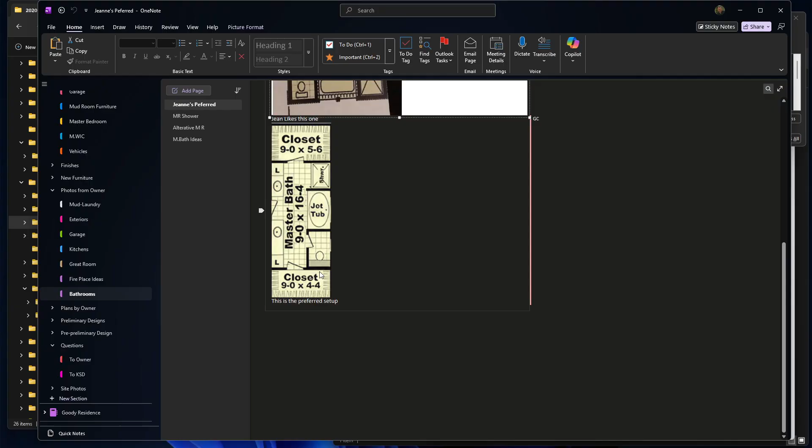We've got these spots, and I thought I should describe it a little bit. You can see this corridor through here, really tight, and then we actually end up with kind of a corridor here too. Once you get these walls built up, this really becomes quite an enclosed space.

So this floor plan, even though it's got two closets, it's got all the components that you guys are after, including these linen closets, which we don't have in your design yet, and you were pretty specific about that. So we need to figure that out. We have a vestibule. We've got a lot of the components of this.

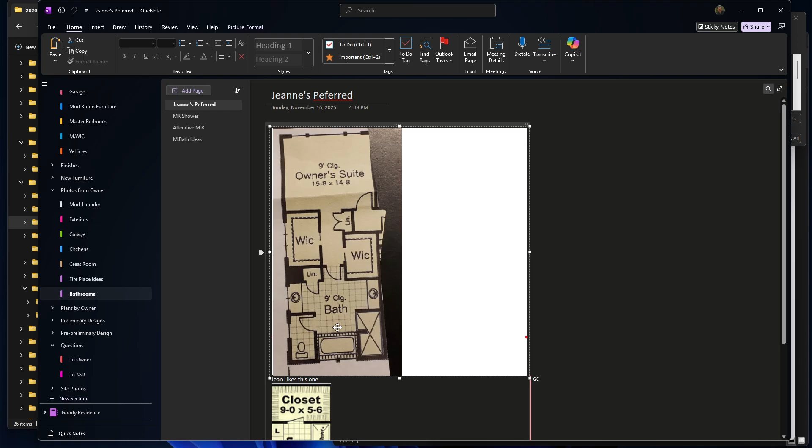But to get the feel, you can see this—I would almost call this a galley style, where we've got a way in and two pretty basic sinks on either side, with looks like they're probably intending on full height cabinets at either end. Guessing what this L maybe stands for, long or large, not sure.

This hanging is not gonna be what it looks like. It's only 4'4" in depth, 5'6" here. That's enough depth that we can actually get something going, but you can't hang opposite of something else without 8 feet. So this is 9, so opposite hanging there works out well.

Think of your clothes as about 2 feet deep once you get the shoulder and sleeves and all that stuff. So if you've got them hanging on either side, and then you've got 2 rows high, if you've only got 3 feet of space in between, then you've got 3 plus 2 plus 2. So that's basically 7 feet right there. So I kind of keep it down to an 8-foot minimum.

Prefer 9 to have hanging facing hanging, because you can't see your clothes if you're squished up against them. Even if you can fit in there, it just isn't any sort of luxurious. It's like squeezing things into place.

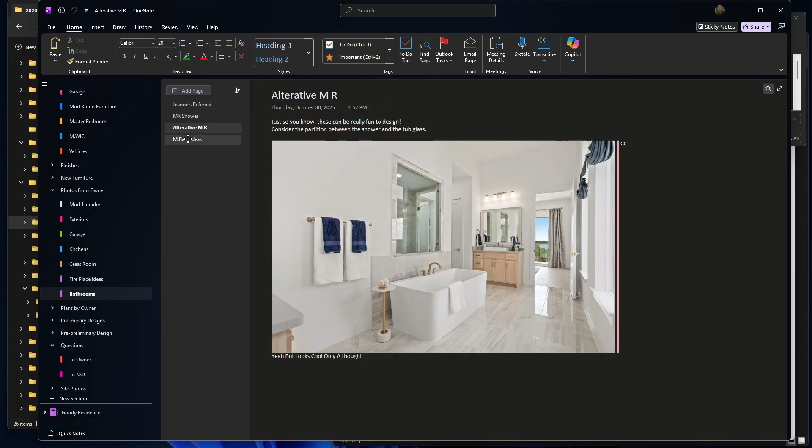We got places to put our towels. We need to have some wall space for towels in the bathroom. And then this, we've got plenty of room in our design to deal with that. And so we'll take a look at that.

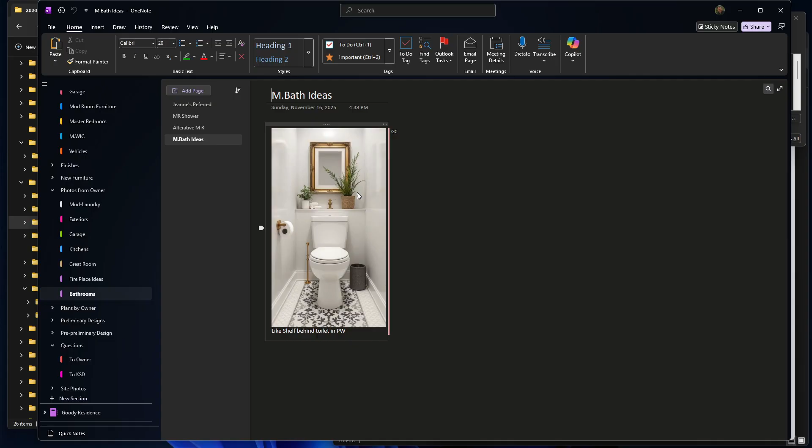But yeah, I think I like the way that this looks, and you've got to give up something to get something. And so if we want to have this space back here for you to decorate with, then we just need to accommodate for it.

So this layout here really works with what we've got going right now. So I'm going to try and work on this, and hopefully you really like this picture. And that kind of goes along the lines here.

We do have the shower, tub, and then we'll have that toilet down at the very end in the floor plan that we're working with.

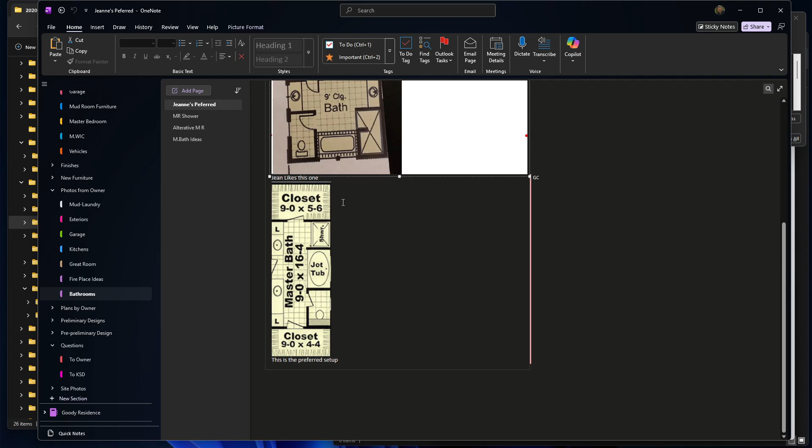I had to stop my recorder there and switch scenes. Let's close this down a little bit. And so this is the bathroom. I'm going to really focus on the bathroom for this video, try and keep it kind of short.

So what we're talking about is looking down, and this is the wall niche right here. So when the door's closed, you can see this wall niche, and we can make that any shape, size. We don't have to use it at all. Just was a thought.

Then, so in the vestibule, as we look down here, you're not looking into the bedroom, you're not looking into the bathroom, even if the doors are left open. Everything is just a nice flow, so your private and public are very separated. And you turn and go into the bedroom, or you come straight through and into the bathroom.

So what I'm looking at is taking and replacing this with that shower to get that look you're after, and putting the toilet down in this area, which is part of our last conversation.

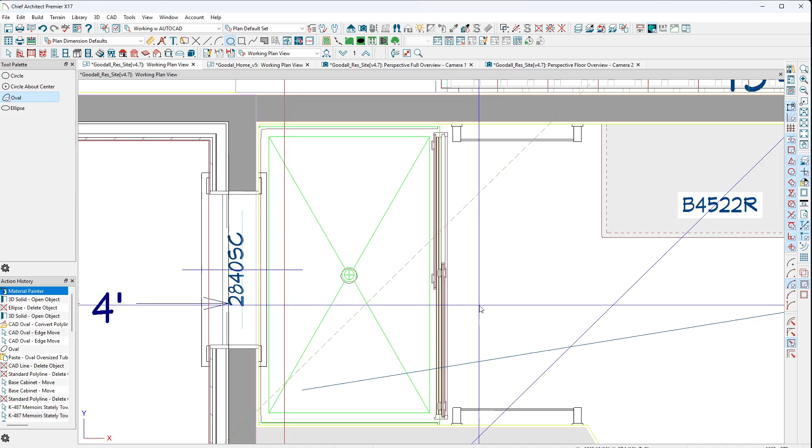In order to do that and get you that area behind, I need to pull this wall down some, because this is about enough room for a toilet, for a long toilet, which I think you want the comfortable one. So we need about 5 feet for that, and this is 4 feet across. And I know it's hard to tell, but right here, this little yellow line, that's drywall. I show the drywall so I make sure I've got the clearance. If I were doing a shower in here, we either have to use a cheap insert, or we need to buck this out a little bit to get some real tile in there.

So when we lay out what the closet looks like, I need to be considerate of how we keep things from hitting other things. That's why I put those end caps on these clothes racks so you can see how that works.

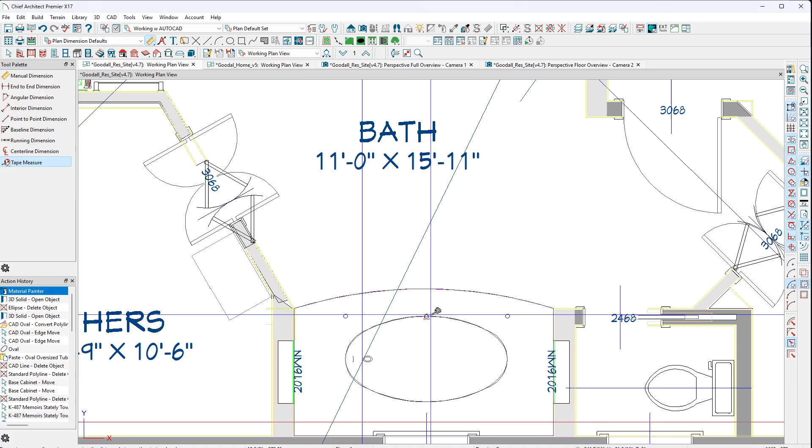This distance here for the tub I've shown is about a 5-foot tub. I used an oval in here, but it doesn't matter what we use, so about a 5 by 30. You can see I've got generous space here - this is actually a very large platform. So to get a nice shower in here, we're just going to bring this down, shrink this up a little bit. We might lose our center, but the roof center is over here anyway, so it's not part of that. And if we have a flat ceiling in here, you'll never know it - it's not relevant. So we'll be fine with that.

So I'd pull this in a little bit, then maybe we can scoot the tub down to the right slightly, and get a larger tub shower in here by shrinking up this space, because right now I've got 8 foot clear in here. No, that's not showing 8 foot. I swore I had it. There it is, 8 foot. I thought I had 8 foot. So you can see he's got 8 by 6.5, and then you've got almost 9 by 10.5. That's kind of what I'm looking at for how this is going to work out.

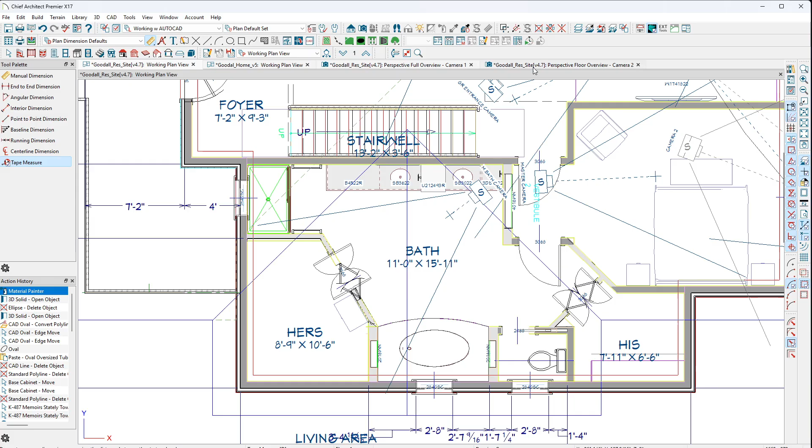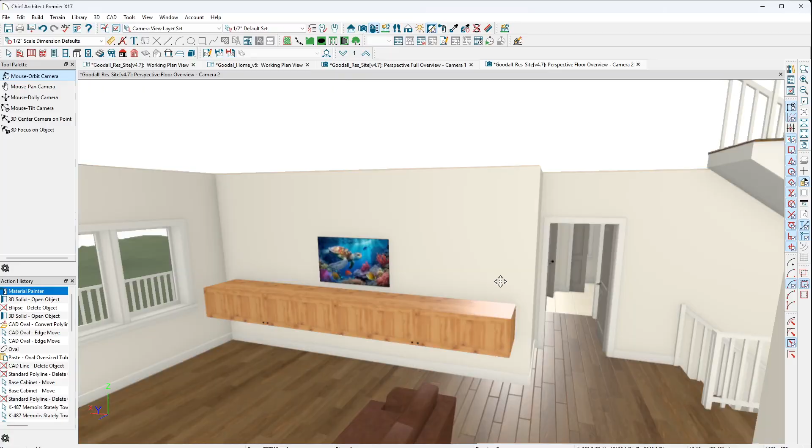This is 4.7. So let's jump into this view and give you a once around of how it looks for layout. This would be the master bedroom. Now I've seen your pictures where we're probably not going to do this suspended - that's just thrown up there to help with scale. It's not doing anything, it's not designed, it's not the right wood, none of that stuff is happening yet. I'm really trying to get just the layout and how this house flows, and then we'll get into the finishing touches and details.

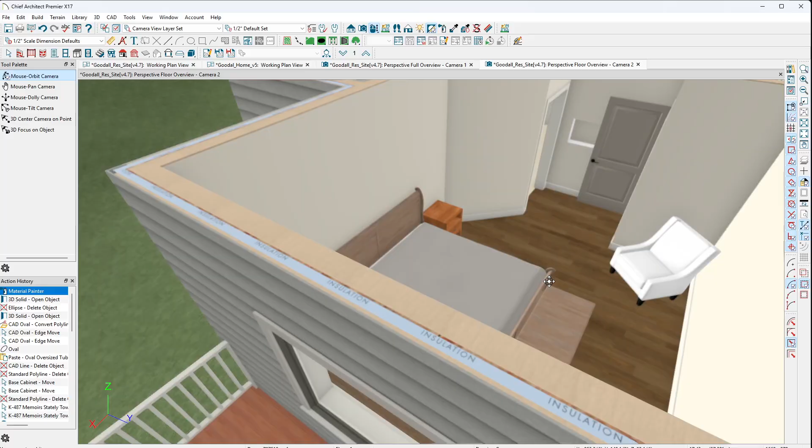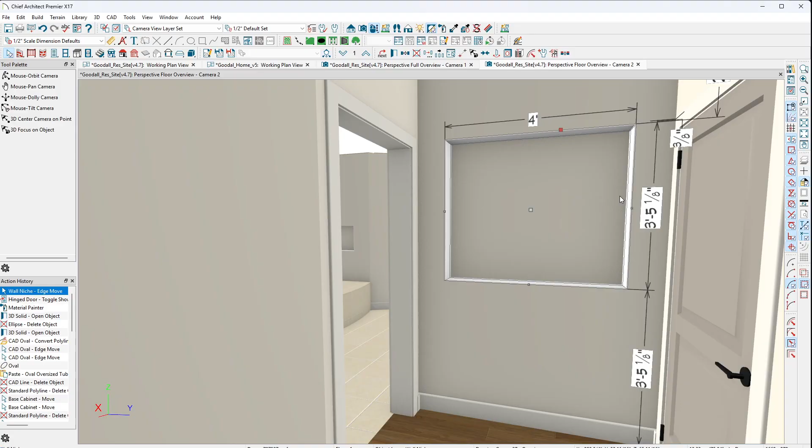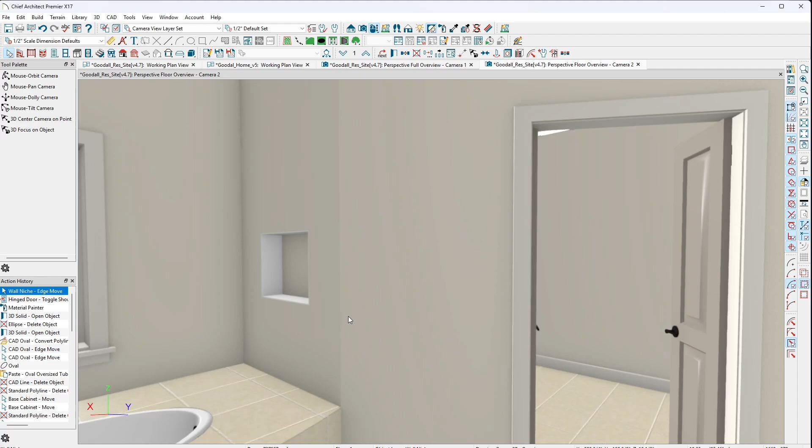So you've got the bedroom, this is that wall niche, and I can take this and close it so you can see. When we have these wall niches, whatever shape - we could arch the top, put a design, trim it in wood, whatever we do to make this all tie together. Right now we come through, and this would be turning into the shower, and we'll have to shrink this down slightly. So you can see the wall niche on that side and one on that side. I haven't got the closet stuff put in here yet, so it's a little deceiving as to what size it really is - I've only got the chest in there at this point.

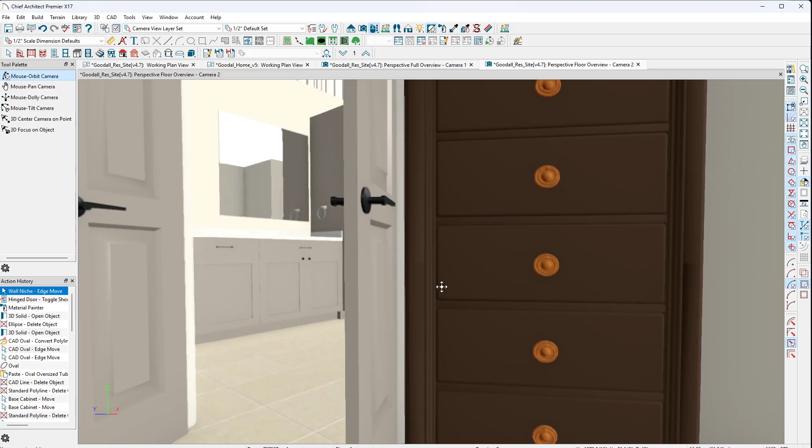Sorry, didn't mean to do that. Let me jump up - oh, I switched to the other drawing, that's what happened. So that is basically what I'm looking at right at this point. I want to keep this sort of short because I've got other things I want to work on as well. But that's my thoughts - I've got this divided by the one cabinet, I've got the his and hers.

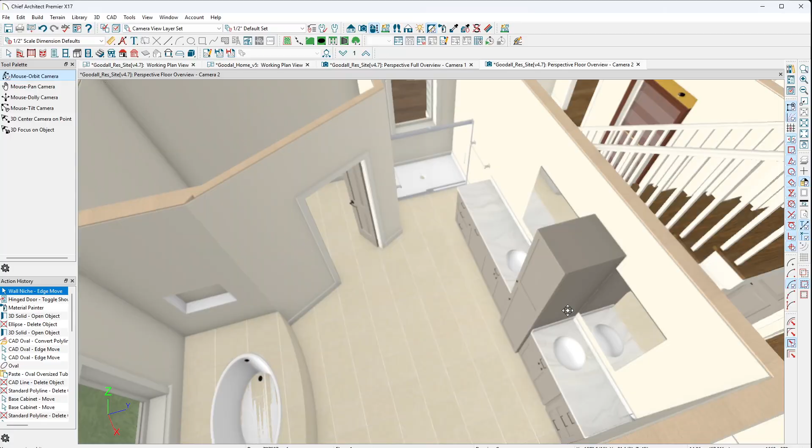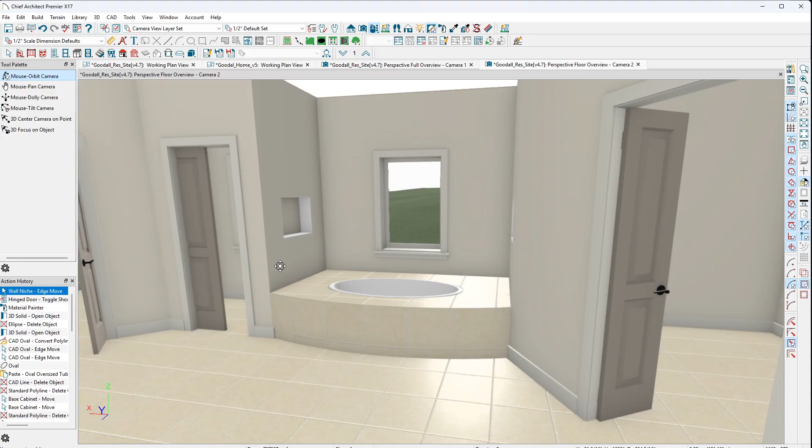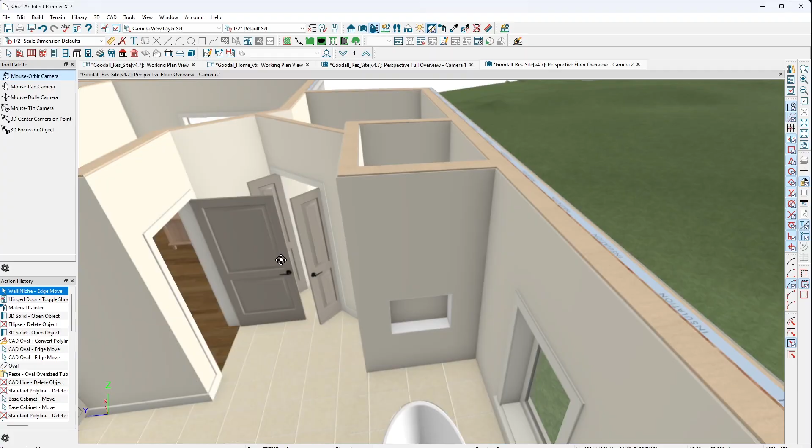We don't know what our mirror designs are like or any of that yet. Got hanging for the towels, but if this becomes the toilet, then I've got to find hanging over here, and a lot of times that gets overlooked. Yes, you can have the hanging on your glass doors - that's fine, it depends on if that's fine for you guys. If it's not fine to have it hanging on the glass doors, please let me know. If it's okay one way or the other, you don't have to say anything. But if it's a problem, I do need to know that.

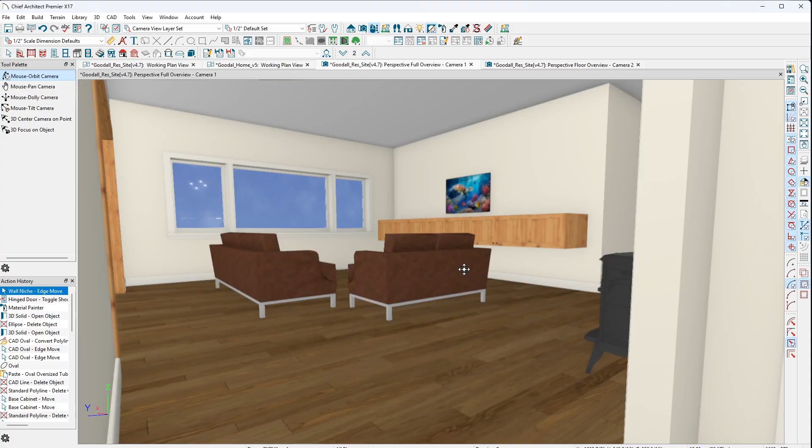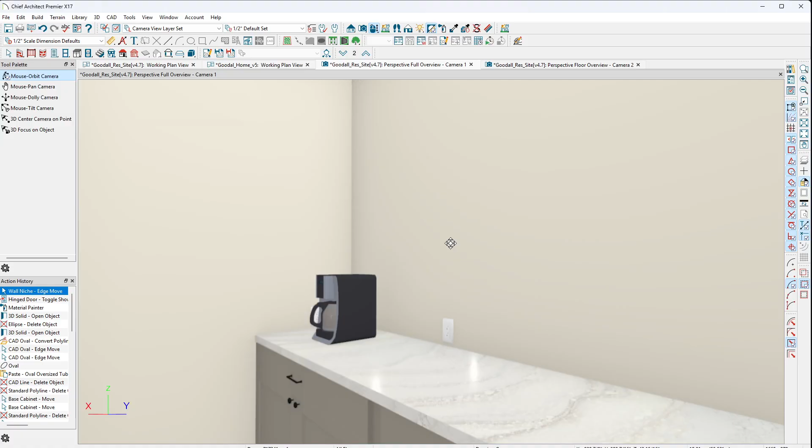Let's switch to the one with the roof on it and come inside. I'm going to take a quick little shot, come in the garage, turn here. I just want to show you what some of this general layout stuff is starting to happen. This is the pantry - I haven't done anything with it yet, but there's the pantry. We've got outlets coming in. Just trying to work out the really minor details, so don't think it's anywhere near close.

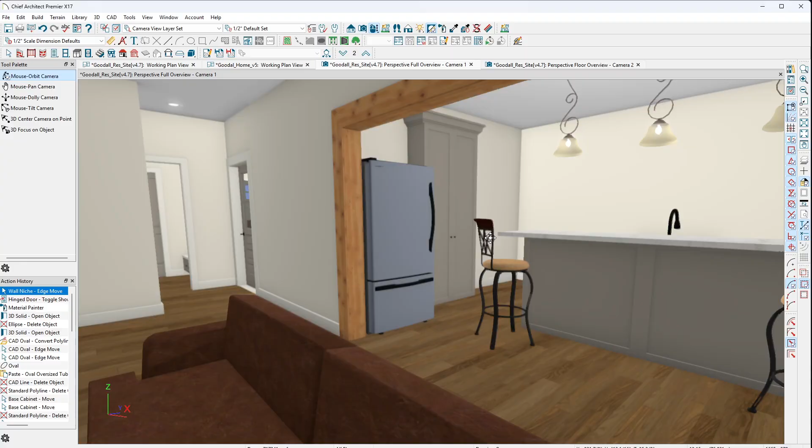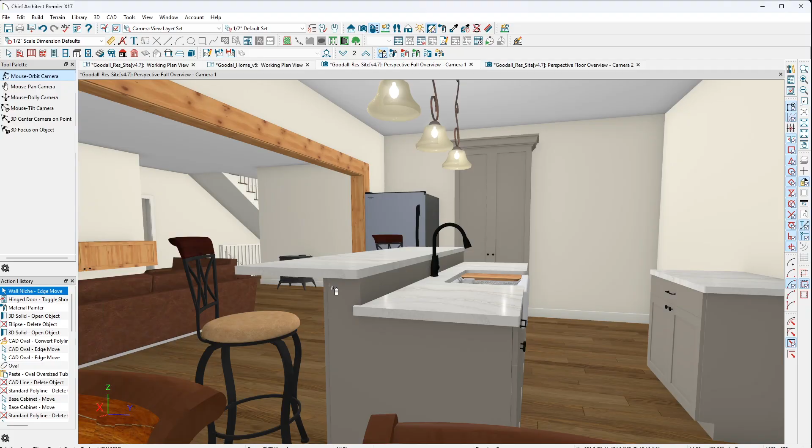We just want to see how it works. And then we're going to change this up, because I remember your discussion about wanting seating at one end and not just straight across the bar top. Maybe that means we don't have a raised bar, because that would be kind of odd. If we're doing this raised top situation and you want outlets along this wall, then having end seating, we'd have to do maybe one portion raised and then drop all the way across at one end. Especially with the furniture look, we can make that look unique and different. So we'll have to think that through.

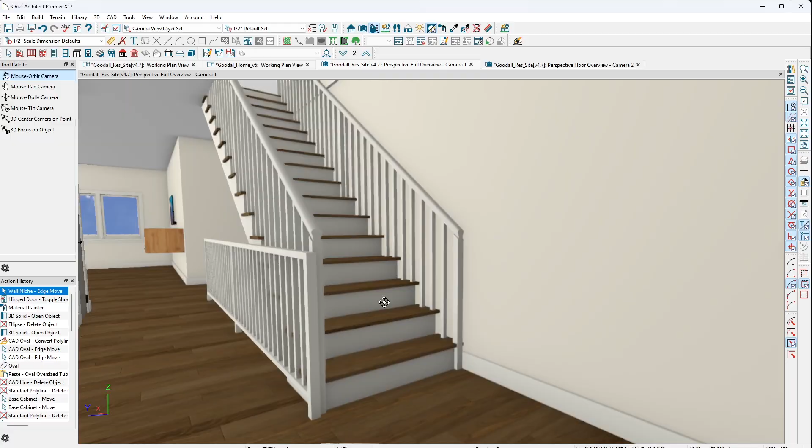But what I really wanted to show you was how this works, since we were discussing the stacked stairs situation. So there's your cabinet, and this will be the entry door. We'll have to work on railing designs and all that. But we come up and we've got a generous bonus room up here where we can put windows. The only area that's a little bit tricky - oh, it's even gone, I don't know what happened with it. Oh there it is. So I might have to figure out what to do with the roof, but this would be almost a crawl through it. But you could get through it, and then you're into the big room above the shop.

And these are those 8-foot wide dormers. And so this is above the shop.

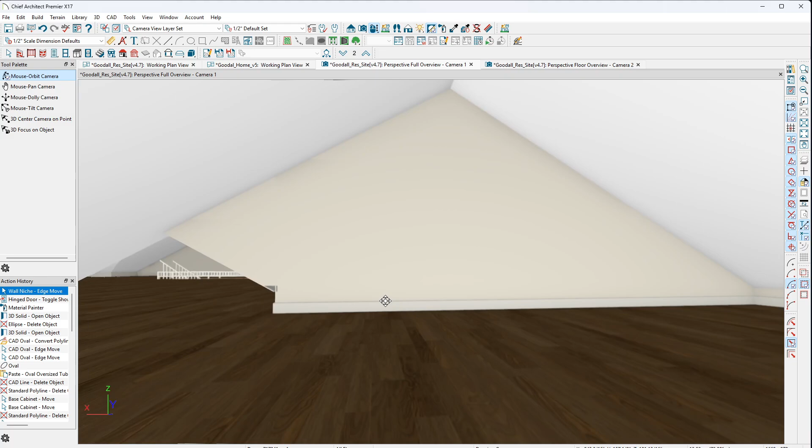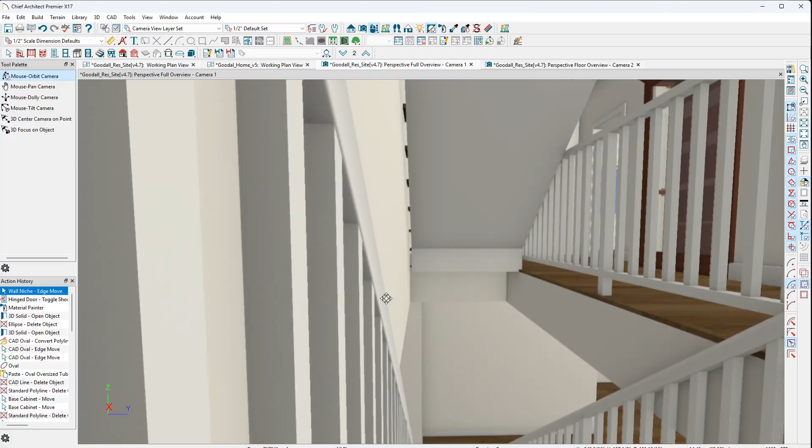Then obviously it's the room height - I told it what height to put the railing at, so don't worry about that. This would come down and then you'd come back along here, turn, and go down again, and you end up in this basement area. Once we get the openings to the daylight side, this will really open up.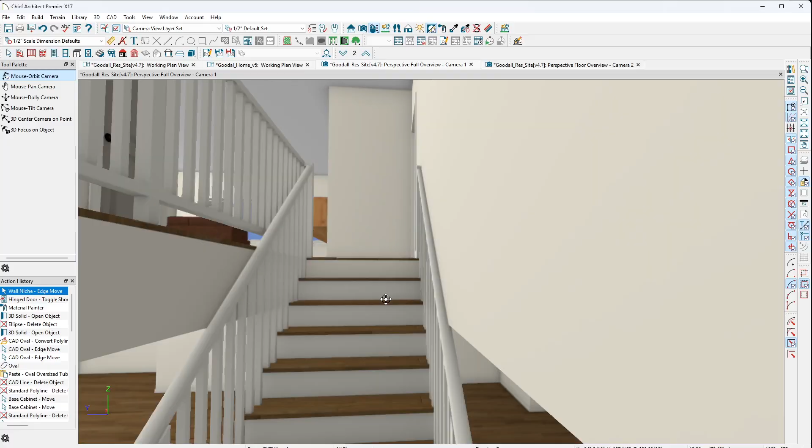So that's where I'm going to leave it at this point. Just wanted to give you a quick show-around of this, so you understood how these stairs work and how everything's coming together.

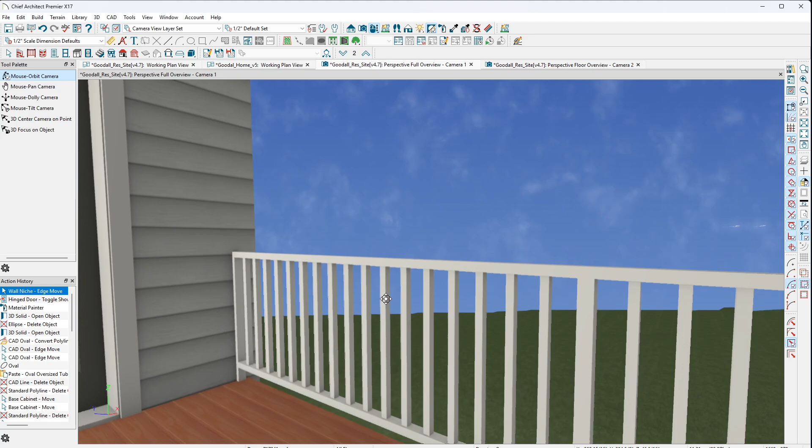So hopefully this helped. Oh, I haven't doubled this door because it actually turned out to be maybe too narrow to have an Arcadia style door. You can see I don't have a lot of extra wall here, unless we bring this deck out - which we could, but it's not going to increase your dining room size. But I would like to bring the deck out because it'd be nice if this was 12 feet deep. I think you would be very happy to have a 12-foot deep deck and not 8 feet.

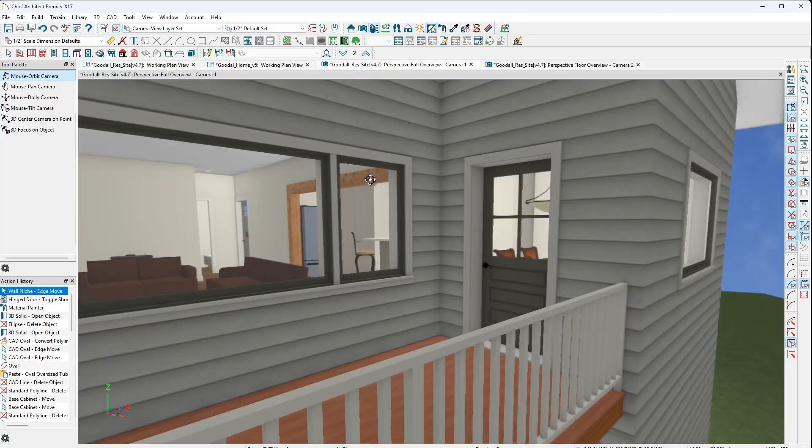That one's operable. I haven't thought about the design of these windows yet - I just put them in here to get natural lighting and some sense of how this is all coming together. But if you start to look at and use that software, I'm going to send this over.

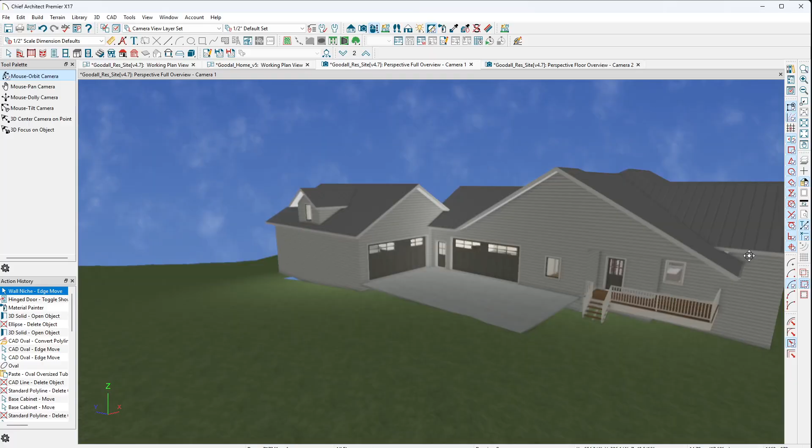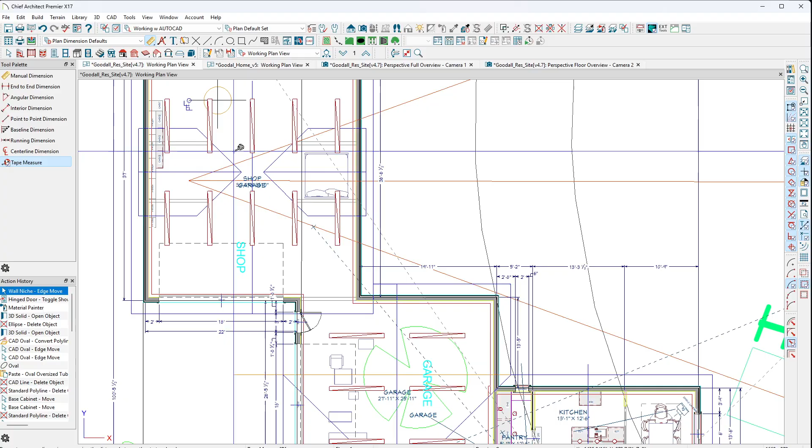Oh, I should tell you how this works a little bit. When you're in the floor plan - let me switch back here real quick - you'll notice I've got cameras all over the place. These cameras you can walk and move just like I'm doing, not quite as easily because I've got a special controller, but you can still walk with any one of these cameras. Every time you close the file, they'll end up back in these positions. So I placed them all over the house because walking on a phone can take some time to get all the way over to here.

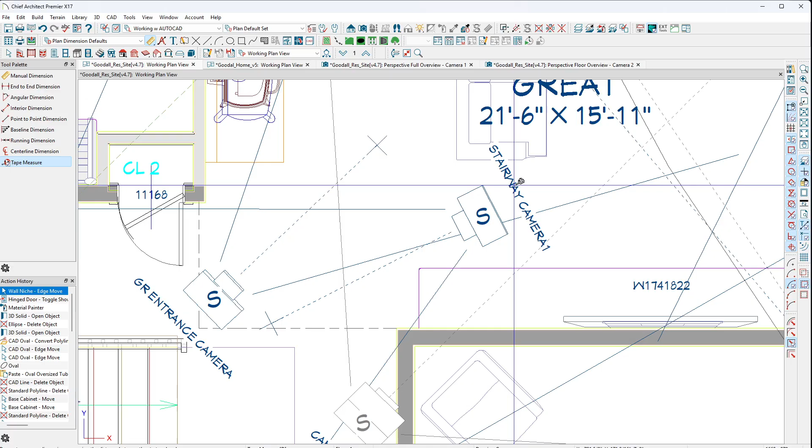So I like to have a camera in here, and I'll call it the shop camera. You'll be able to go through the list of cameras, and it'll help you get from one place to another quickly, and then you can rotate about. That's why there are so many different cameras, and they have names. This is the master camera, this is the master bath camera, this is the great room entrance, this is the stairway - you can see the stairway camera is looking toward the stair, the great room's looking towards the great room, and then there's another great room towards stove camera.

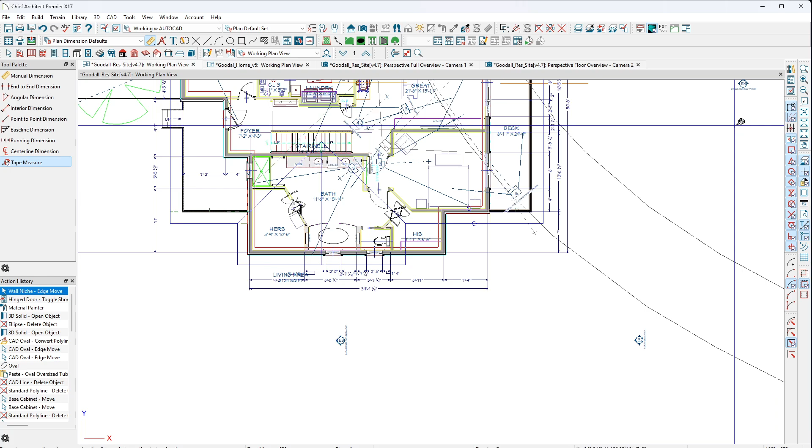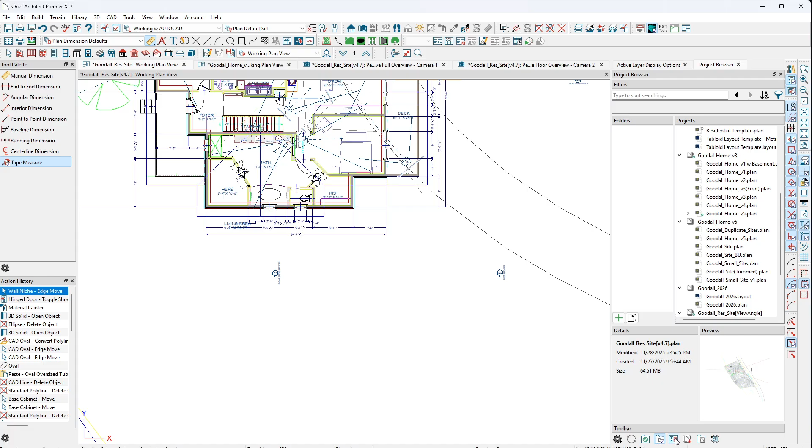So if I were to go into the project browser - let's see if I can get to the right one. Not seeing it, why am I not seeing it? I don't know why I'm not seeing it, but there's a list of cameras - you'll have it in your software. I'll figure out why I'm not seeing it here, but they're developed. Maybe I've got something turned off here as far as choices down in the preferences. I may have something turned off, but I'll figure that out. It should be plenty showing there. If you have any troubles, let me know.